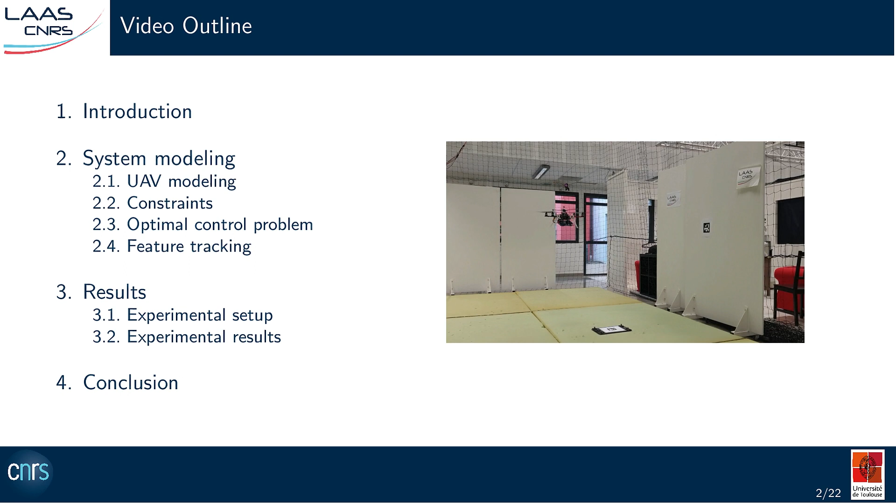In this talk, after a short introduction on the objectives and motivation of this work, we're going to present the model of the system that we used, including the model of the UAV, the model of the sensors, the constraints that act on our system, and then formulate the optimal control problem. Finally, we will present the results that we obtain both in real experiments and in simulations.

This work is an extension of a work previously published in ICRA 2020, and its main objectives are to define a nonlinear model predictive control framework for what we call generically tilted multi-rotor UAVs. We wanted our framework to compute the real actuation input of the platform, which are the motor torque input. And we also wanted to include some perception constraints on the system, as well as some realistic actuation constraints.

Our motivation was to ease the use of such aerial vehicles in critical situations where perception is an important factor, such as, for instance, search and rescue applications, or applications in a cluttered environment or in human-populated areas. Such critical tasks where the perception is important can be, for instance, maintaining the visibility over an important feature, maintaining the visibility over a set of fiducial markers that could help the system for localization, track a mobile phenomenon where the time coverage is important, or even maintain some safety distance with respect to the environment.

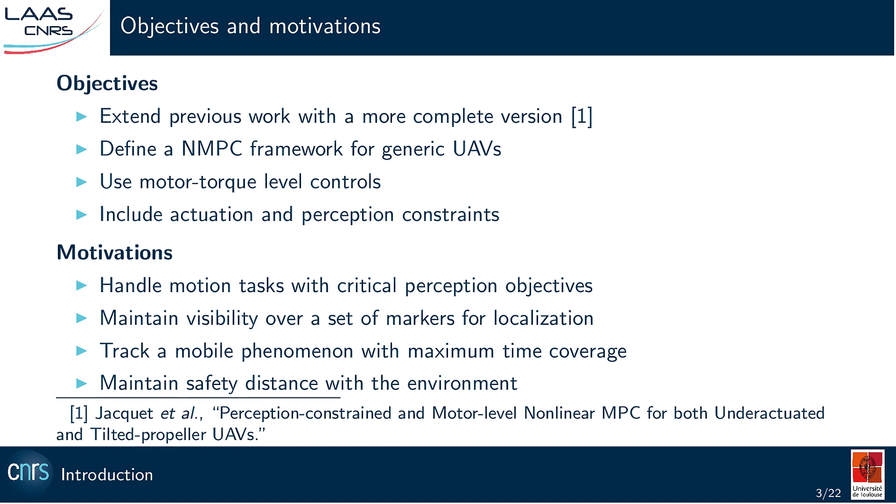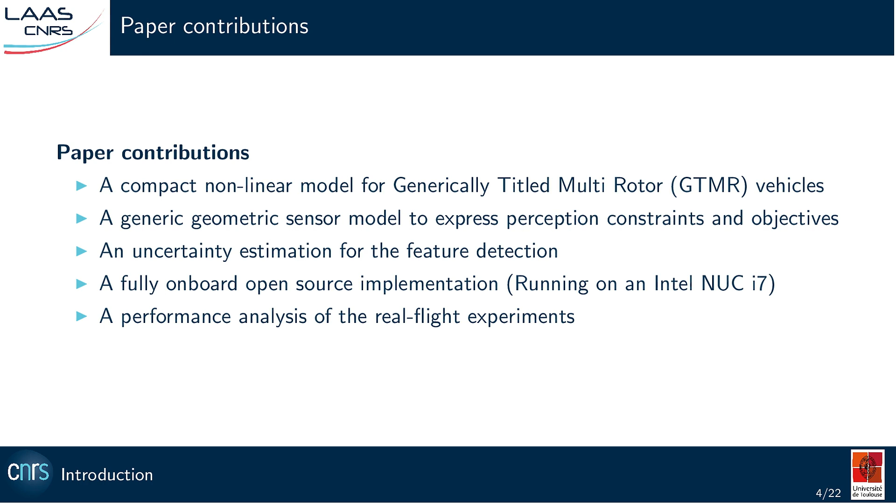The main contributions of this work are to propose a non-linear model for generically tilted multi-rotor vehicles, to propose a geometric model for generic sensors, in order to express the perception constraints and objectives, propose an uncertainty estimation for the feature detection to express this constraint, propose a fully open source implementation that is running on board on a standard Intel NUC PC, and finally propose a performance analysis over some real flight experiments.

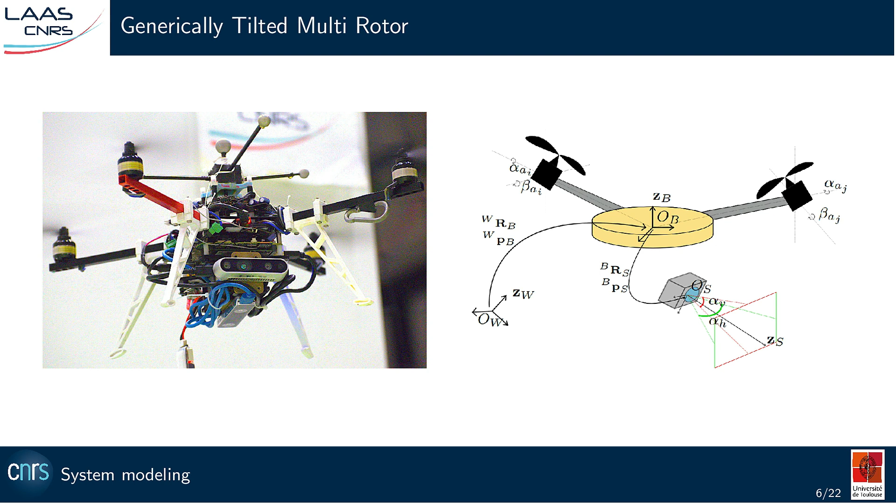What we call a sensor is a device that is able to retrieve in its own frame the 3D pose of an object that falls into its field of view. In this graph, you can see the depiction of the model of a monocular camera. That is the sensor that we chose to use for our experiments. The motivation behind this choice is the large availability of such sensors, as well as their light weight, that eases their use on a flying platform.

The state of this system is described as follows. First, the state of the body, which is composed of its position in world frame, its attitude, depicted in quaternions, as well as its velocities and angular velocities expressed in world frame. Second is the state of the actuators that we chose to depict using the vector of the N forces exerted by the N propellers. Finally, the input of the system is the derivative of these forces.

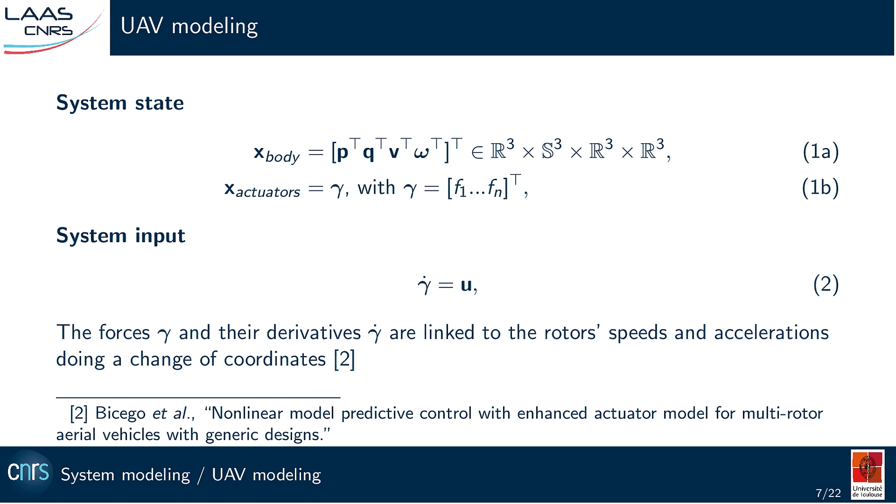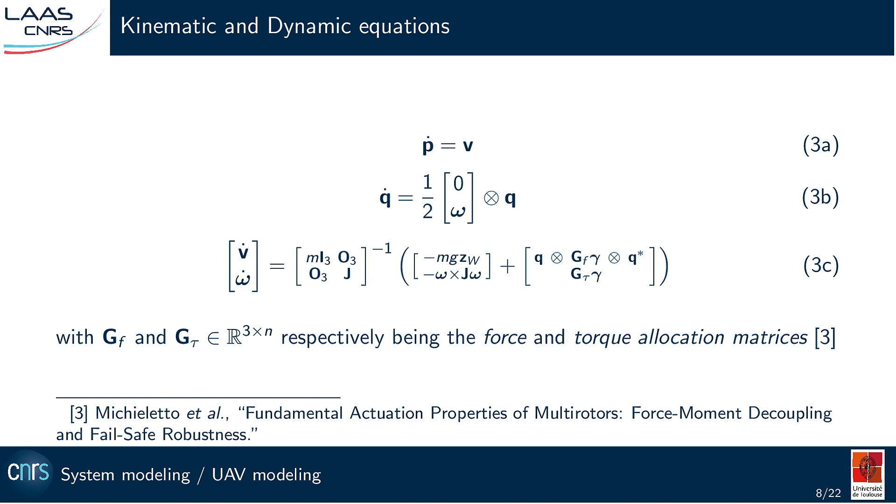It has been shown in previous work that these forces and their derivative are linked to the speed and acceleration of the propellers by a change of coordinate, and that using these as the system input is much more realistic since it can be equivalent to considering the motor torque as the actual system input. The kinematic and dynamic equations can be written as such. The equation 3.b links the attitude, represented in quaternions, to the angular velocities. The equation 3.c is the complete dynamic equation of the system.

From what we saw, we can now express some realistic actuation constraints on the platform. We want that the state of the actuators, gamma, is within some given bounds that are linked to the physical limitation of the actuators, and are typically given by the constructor of the propellers. And we also want that the system input, gamma dot, is also within some given bounds. The lower and upper bound of gamma dot can be obtained through an identification campaign.

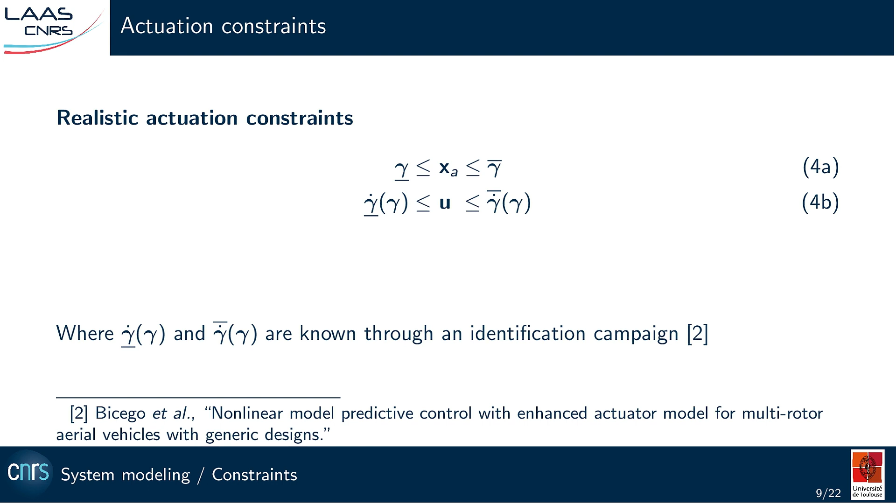Now we are going to express some perception constraints and objectives to which our system is subject. First of all, we want to express a field of view constraint, or FOV constraint, that expresses the fact that a given point M falls into the field of view of the sensor. In order to propose a realistic model of a monocular camera that has a pyramidal shaped field of view, we need to decouple the horizontal and vertical FOVs of the camera.

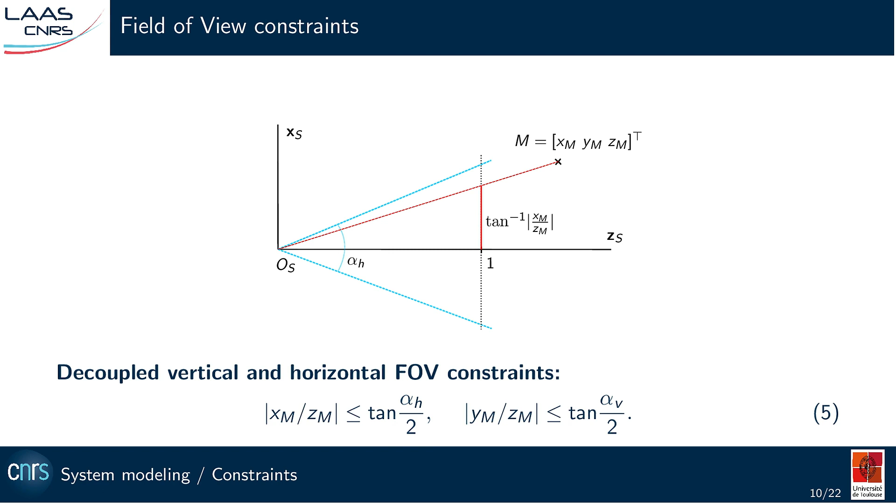In order to increase the reactivity of the system, it is important that the feature is always as close as possible to the image center. Hence, we want to express this objective in the cost function. We want to minimize the angle beta between the feature M and the principal axis of the sensor, which is equivalent to maximizing the cosine of this angle, whose computation is more efficient since it consists in a simple dot product.

We also want to minimize the derivative of this quantity, since it will help to reduce the motion blur and improve the tracking of the feature. We can now express the full optimal control problem as such. We note that the equation 6a is not rigorous, since we are considering the geodesic distance between quaternions instead of the Euclidean one. We decided to keep this notation for the sake of legibility.

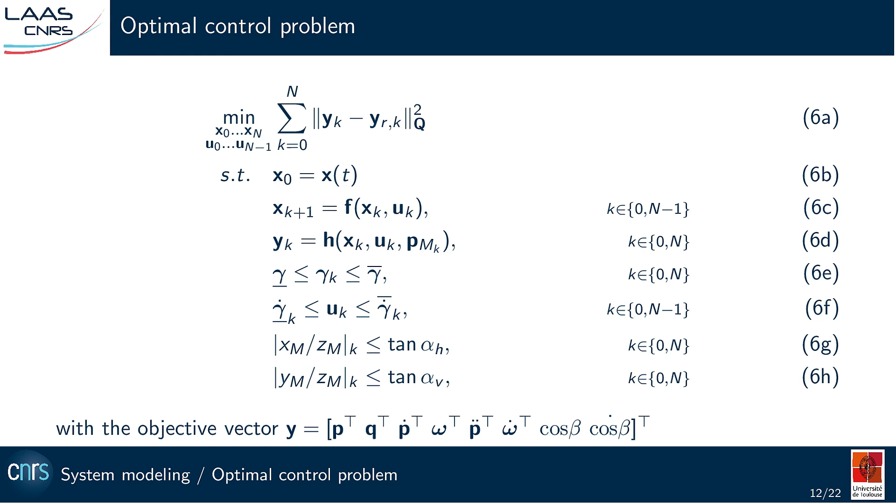In order to improve the tracking of the 3D pose of the moving feature provided by the sensor, we use the standard extended Kalman filter. Since we are using a monocular camera, the real measurements are the pixels of the four corners of the fiducial marker. Hence, the 3D pose uncertainty sigma m is computed from the pixel uncertainty of the corner measurements that are propagated through a first-order approximation scheme.

I will now present the results that we obtained using the implementation of the model that we presented. First of all, a few words about our software implementation. Our code was written in C++ using GenoM, which is a middleware agnostic component generator that can be compiled for a given middleware, such as ROS or YARP, for instance. This implementation is fully open source and can be downloaded along with all the materials required to run some Gazebo simulations.

This is the hardware platform that we are using. It is a handmade quadrotor equipped with an Intel NUC onboard PC. The sensors that we use are two Intel RealSense cameras, one down-facing and one front-facing. Each camera will be assigned to tracking one fiducial feature. And the state feedback of the quadrotor is given by the motion capture and the IMU.

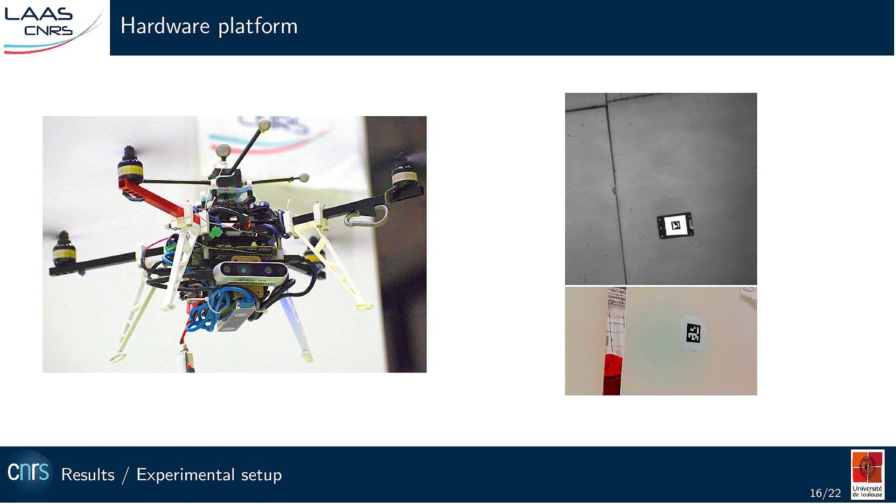Now, we will enable the perception constraints and objectives. The reference waypoints given to the UAV are exactly the same as just before. We see that the UAV motion is modulated to comply with the constraints, and indeed the fiducial marker never leaves the field of view of the two cameras.

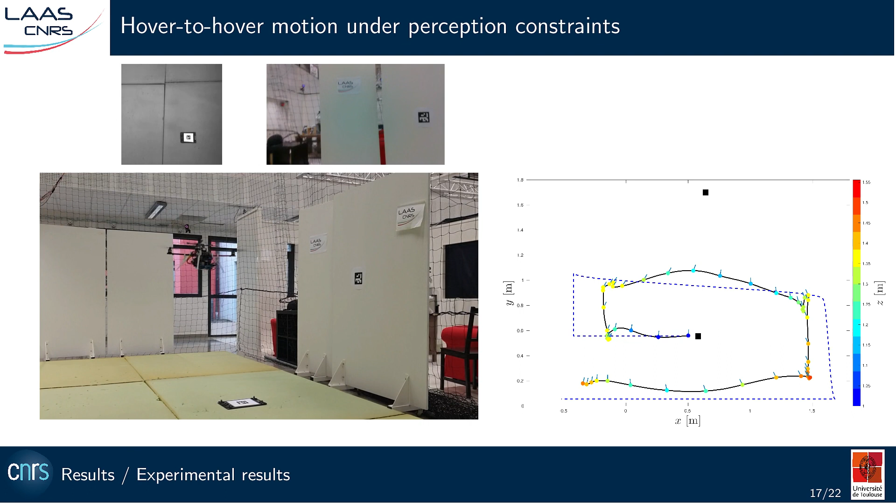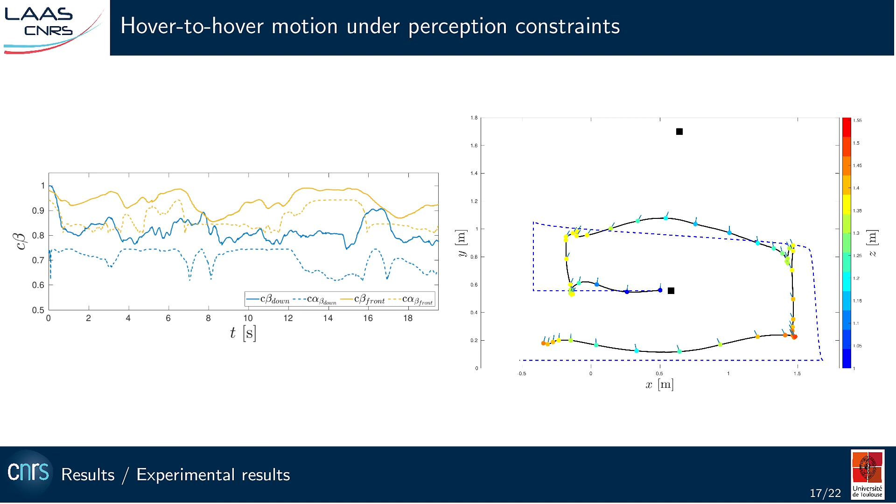However, there is a trade-off between the perception objectives and the trajectory tracking. In order to ponderate the two tasks, one has to play with the weights of the cost function of the MPC. The plot on the left shows the values of the cosine of beta and the associated lower bound. It is a condensed representation of the field of view constraint that is imposed. We see that for both cameras, the constraint is never violated along the motion.

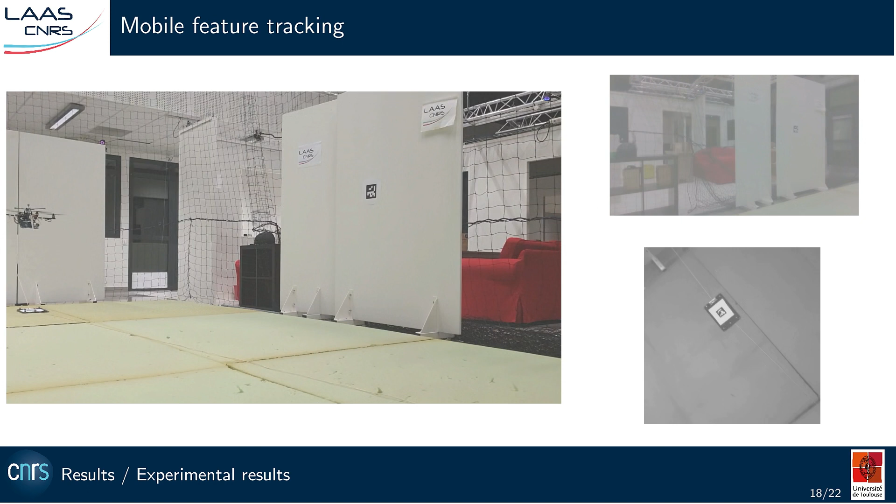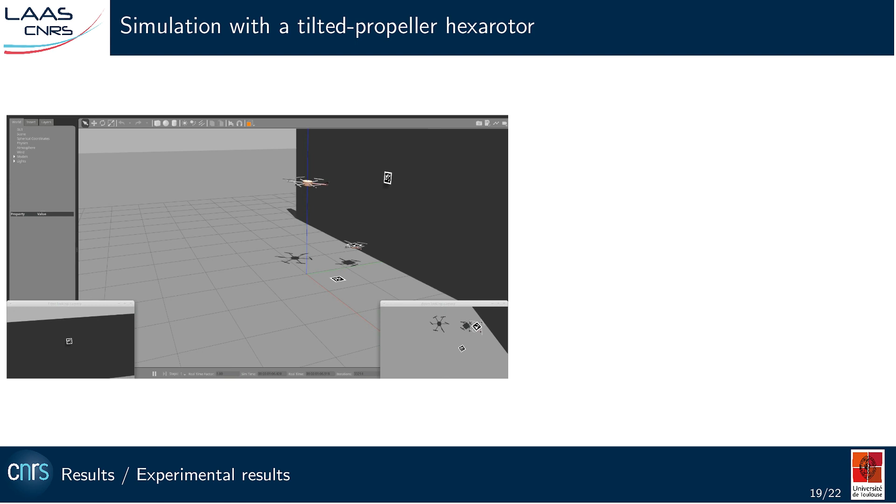I will now present a simulation with another type of UAV, a tilted propeller hexarotor, that has a larger actuation span than standard quadrotors. The objective of the hexarotor is similar to the previous experiment, staying on top of the mobile target, while keeping two other features in the field of view, one with the front-facing camera and one with a down-facing camera. In order to simulate a mobile target with a slightly erratic motion, we attached a fiducial marker on top of a moving quadrotor with slightly detuned gains.

The hexarotor is controlled by the NMPC, and we see from the video that the constraints are never violated along the motion. Something interesting from this simulation is to see that the hexarotor is able to take advantage of this larger actuation to maintain the visibility in some configurations that the quadrotor cannot reach, in particular being stable with a non-zero roll and pitch.

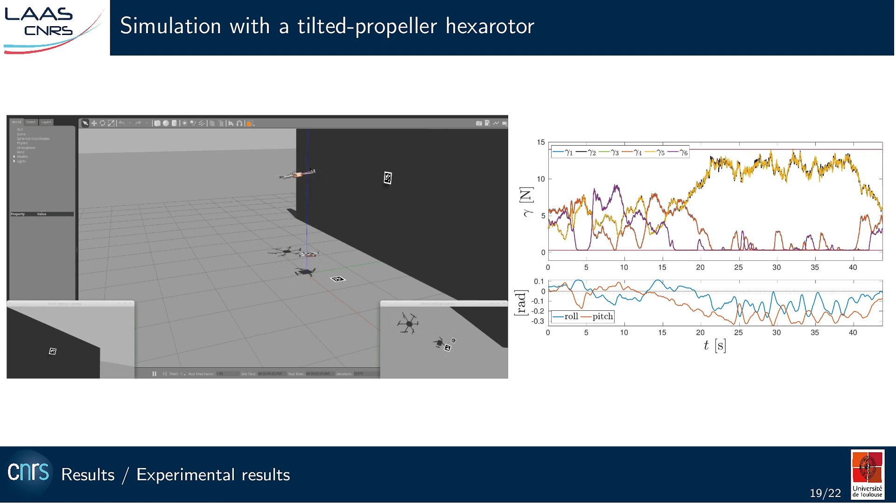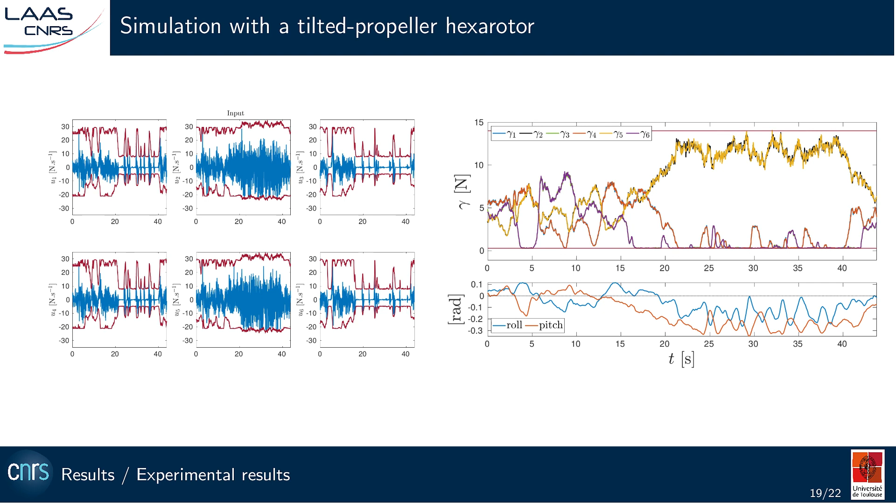To conclude, the achievements of this work are to extend the previously proposed nonlinear models with the use of quaternions, to propose a fully on-board implementation of the NMPC that is able to handle several types of UAVs, to handle realistic actuation and perception constraints, and to propose a fully open source implementation of this framework with the material required to run some simulations.

Some possible future extensions for this work include the extension of this framework to multi-robot systems, the handling of NMPC failures, for instance where the constraints are not feasible, to add some visual inertial state estimation in order to get rid of the motion capture, and to replace the fiducial marker with some image processing detection algorithm.